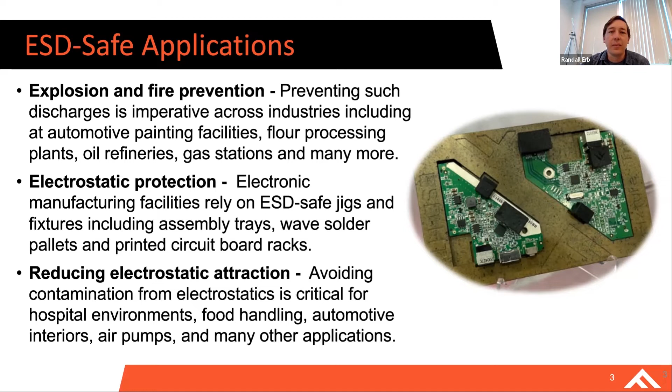One of the most effective ways to prevent the buildup of electrostatic charge is to allow the static charge to dissipate from the material component. This requires the material component to be somewhat conductive, but not so conductive that electrical shorting can occur.

Now Ben will walk us through some conventional and additive manufactured ESD-safe materials.

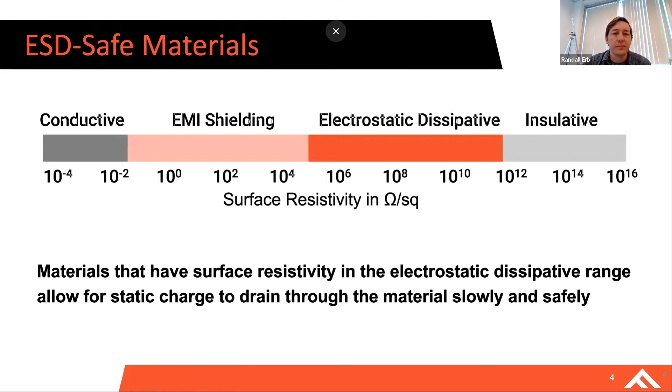Thanks, Randy. So in the industry today, ESD components are manufactured in one of two traditional ways. The first one being injection molding. A lot of your thermoplastics and elastomeric parts today are injection molded, and it's an all-right solution.

You're able to get high quantities for relatively low cost per part, but you run into a lot of lead time issues. You're looking at 6 to 8 weeks, if not more, to source a quantity of parts. Tooling costs are expensive, so for your short run batches of parts, the bulk of your costs are sunk into the tool itself. Once you get up into production scale quantities, it's much easier to swallow that pill.

But for smaller quantities, that's a tough hurdle to overcome. You're also looking at limited customization. You're building a mold tool, you're running parts, and you're not changing up those parts at all. They're going to be the same part from shot 1 to shot 100,000, so it's really tough to customize those parts.

On the other side of things, there's CNC machining for a lot of these materials. CNC machining does enable a lot more customization because you're doing one part at a time. You're able to change up tool paths in between so that you're able to create some more unique parts. You're still looking at some of the same lead time challenges though, where it's going to take anywhere from 2 to 4 weeks plus to get your machine samples.

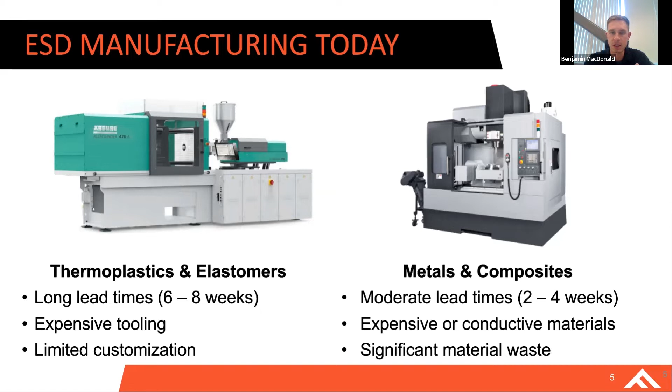It's also a very significant source of waste. You typically start out with a sheet of whatever target material you're going after, and you're machining away a lot of that material, so there's a lot of waste generated during that process. Ultimately, it's not an ideal solution.

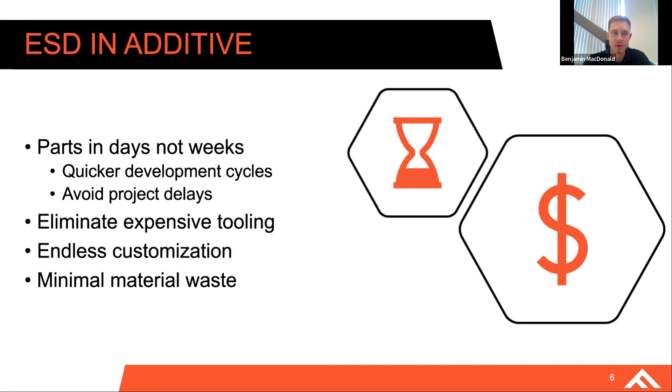Additive has jumped into the ESD market, and it helps overcome some of these hurdles. You're able to get parts in days, not weeks, enabling quicker development cycles and avoiding some of the delays caused by lead times for machined parts or molded parts. You're also able to avoid the expensive tooling from the injection molding space and a lot of the waste that you see in the CNC space. On top of that, you're able to have endless customization.

One of the real drawbacks to the ESD and additive space right now is the performance. You're able to get parts fast, with a lot of customization for fairly cheap, but you run into issues where you have to choose between getting FDM parts or SLA DLP parts. For the FDM space, there are some pretty decent materials, but you're struggling with low resolution, poor surface roughness, and these parts are going to be anisotropic. So it really limits what you're able to do with these printed components.

On the flip side, the SLA DLP space allows you to get parts that more closely represent a molded or CNC machined part, but you have limits with the materials you can actually process on these platforms. One of the main things there is that a lot of these ESD safe materials in the traditional manufacturing world are composites—they take a base polymer and add fiber to help tune the properties of that material. You're just really not able to do that in the SLA world today.

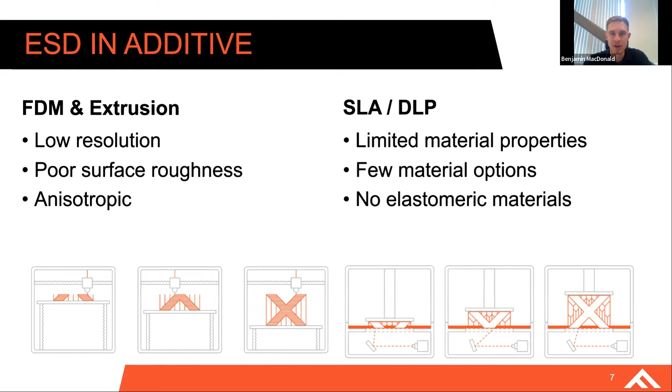And that's where Fortify really steps in. We're able to take additive manufacturing and pair that process with the performance of polymer matrix composites—those ESD safe materials, those highly filled materials that really enable true performance for valuable end use spaces.

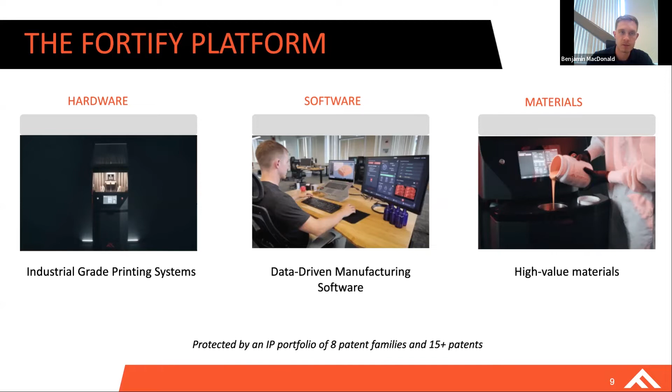So the Fortify platform combines hardware, software, and materials in order to enable users to print these high value materials. We start out with a robust printer platform, our Flux series of printers. We pair that with the Compass software that enables us to do some really unique things with the parts we want to print. And we pair that with our high value materials—fiber filled materials with performance that enables really great applications. So we're going to dive into three different modules that really enable our Fortify Flux platform to get the most out of the materials we're able to throw at it.

We'll start out with continuous kinetic mixing. This module enables us to mix, heat, recirculate, and suspend fibers during the full printing process. So going from layer 1 to layer 1000, you're printing the same material with the same fiber concentration at the same viscosity. This is integrated into all our Fortify printers, and it's really key for enabling us to print these highly filled materials.

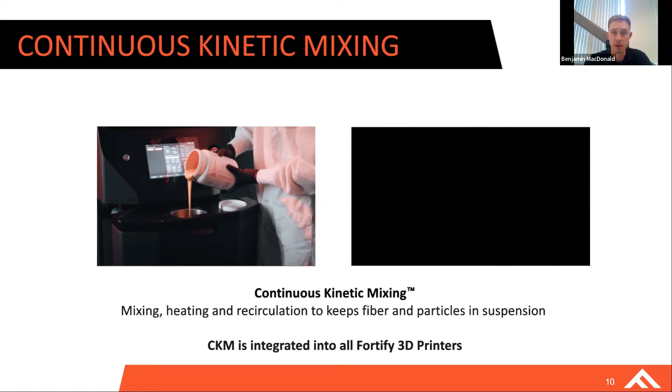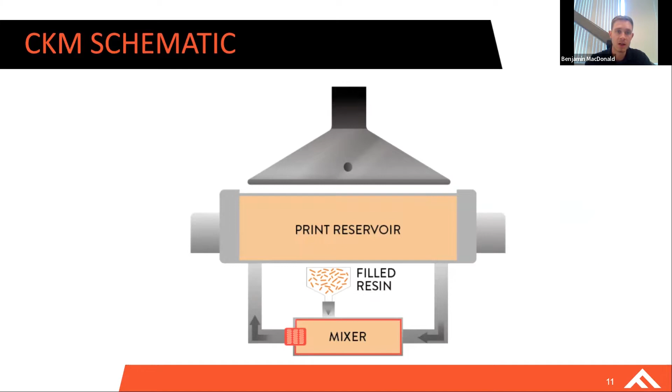This is a quick schematic of CKM, but essentially what you have is your reservoir and a mixer, and you pour resin into the mixer. That's where we heat, suspend, and meter into the reservoir out of our mixer. And in the reservoir itself, you have a continuous flow of fiber—call it fiber rich, but it's really homogeneously suspended fibers in that resin.

And what that enables is isotropic parts during that full print process. So rather than having our fibers be dictated by the layer lines themselves, we're able to orient those fibers in the Z-axis to overcome the traditionally weaker area of printed parts, being the Z-axis of parts. This is really key for us to print these functional parts that we talk about.

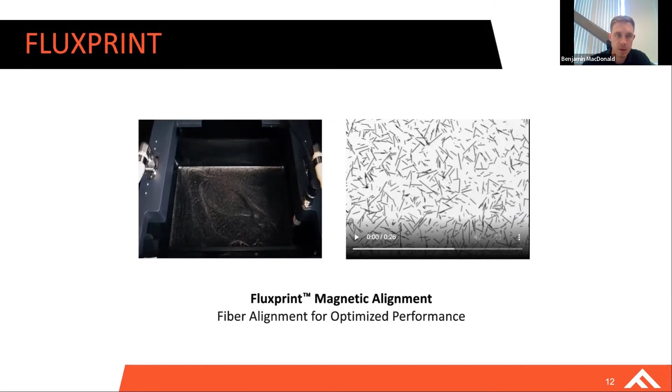We'll take a little deeper dive into the Flux print process here. So what we're doing is, on a voxel by voxel basis, we're selectively aligning fibers and then curing. You can see that we turn a magnetic field on to align in the Z-axis. We're only exposing the voxels that we want to cure with that select alignment pattern. And then we're able to either peel and print our next layer, or generate multiple fields within a given layer in order to really optimize the material properties of our parts themselves.

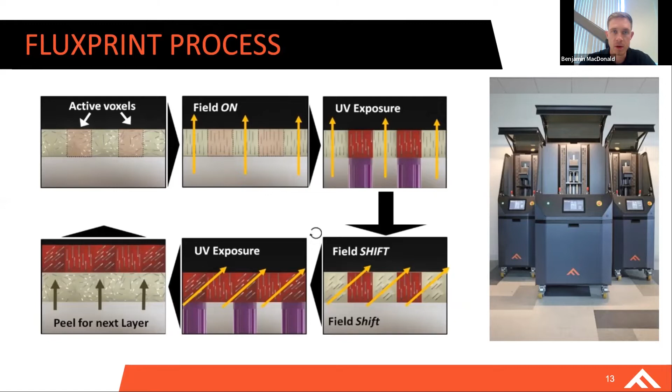With that, I'll turn it over to Randy to dive into our third module. Thanks, Ben. An additional Fortify tool we'd like to highlight today has to do with the complexity of formulating filled photoresins within the DLP printing process. To highlight this complexity, let's quickly break down the anatomy of a layer during a Fortify print.

Fortunately, all of this complexity is addressed in Fortify's Flux Developer platform.

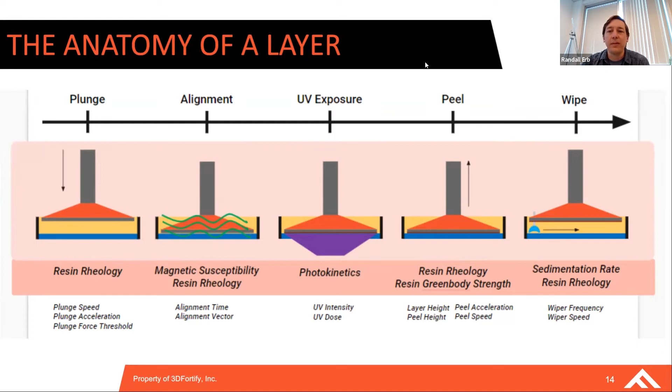What is Flux Developer? Flux Developer is a software product that enables fast to market material formulation work to be completed in filled photoresins. By using Fortify's Flux Developer software product, you can take a materials formulation through a series of onboarding experiments in Fortify's FluxHost printing software to characterize photokinetics, build plate adhesion, sedimentation, rheology.

With these details characterized, you can set up a material print configuration with the online Flux portal that will enable optimal DLP printing out of the gate.

Monitoring printed part properties for key performance metrics, feedback to the materials formulation or material print configuration is straightforward and fast. Our customers and partners use Flux Developer to formulate filled photoresins and speed their formulations time to market.

In addition, the material scientists here at Fortify also leverage Flux Developer to speed our own time to market for new formulations.

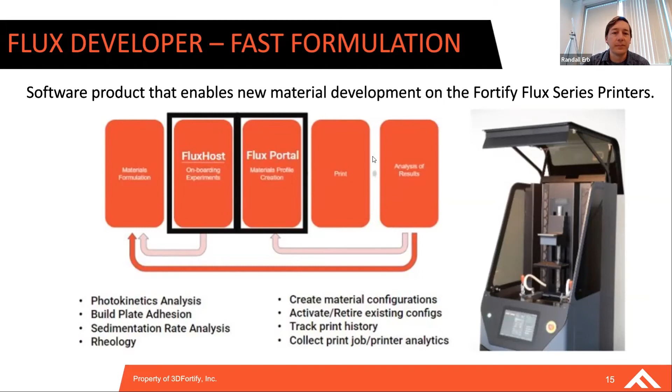By combining the Fortify tool set of Flux Developer, Flux Printer, and continuous kinetic mixing, we have realized two exciting and disparate formulations of ESD resin that are truly unique in the marketplace.

On the left, we have Fortify's ESD HT resin that boasts an operating temperature up to 284 degrees Celsius. This material has been validated in challenging environments like solder reflow ovens.

On the right, and at the opposite side of the spectrum, is Fortify's ESD elastomer. This material is the softest ESD material on the market and has a strain at break of 60%. Both of these materials lie within the static dissipative range and are ESD safe.

Ben will walk us through the details of the ESD HT material first.

Thanks, Randy. So before we dive into some use cases for ESD HT, we'll take a look at the data sheet real quick. So ESD HT, it's a fiber reinforced material. Like Randy said, it's able to operate in temperatures up to 284 C. So it's a really ideal candidate for high temperature applications like your solder reflow oven, things of that nature.

On top of that, it's boasting a 10 to the 6 ohms per square surface resistivity. So it's really ideal for dissipative applications. And it has a best-in-class resolution and surface finish. So you're able to pair the functionality of traditional materials with 3D printing resolution and surface finish.

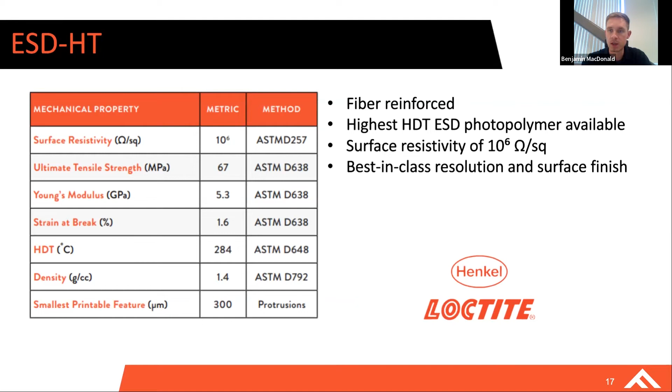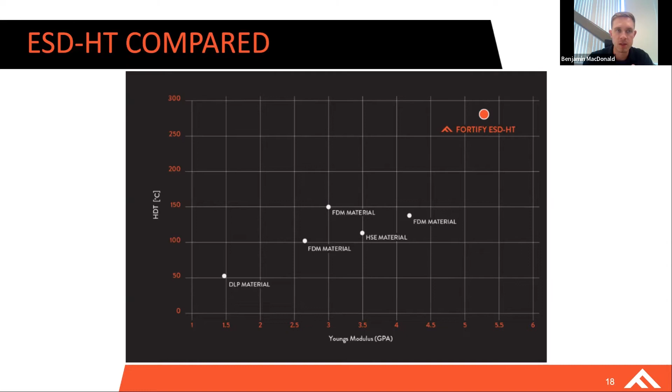So first up, we'll start off with a solder reflow tray. A solder reflow tray is used to fix your PCBs while they go through a thermal bake process in order to essentially melt and cure solder.

Some of the needs for something like this are being able to withstand temperatures up to 250 C, which our ESD HT is more than capable of doing.

You also need to be able to hold a tight tolerance in order to properly fixture these PCBs. If you're not able to hold that tolerance, then you'll run into issues, either fit issues where PCBs don't fit into position, or these PCBs will be loose and could potentially get dislodged, messing up your components and ruining that whole reflow process. And finally, this board needs to be dissipative because you do not want an ESD event damaging a component on your board and ruining the full production process here.

So for the solder reflow trays, Fortify's ESD HT material is really uniquely suited to handle the demands of that reflow oven.

Next up, we have SMT nozzles. SMT nozzles are there for surface mounting of PCB components on a solder reflow board.

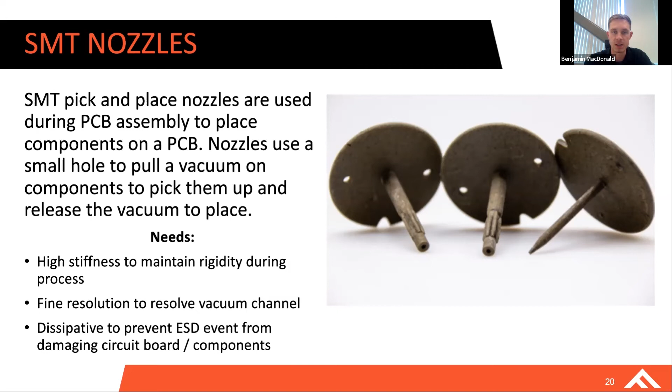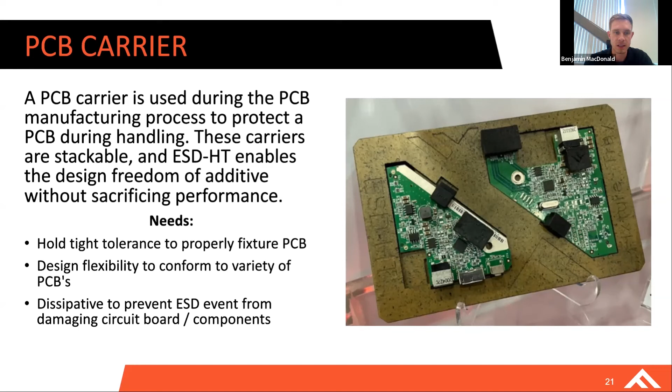When you're going throughout your lab space, your office space, this is going to allow users to pick up this tray rather than picking up individual components. You're going to prevent any sort of static discharge from jumping to the boards while you're transferring these trays. It's great for storage and really just handling PCBs in a safe manner so that you're not adding any unnecessary risks to this process.

And with that, I'd like to call out Fortify's ESD HT pilot program. We're currently running a pilot program for our ESD HT material, looking to get customer feedback and get this material in your hands. For a couple different geometries, including tensile bars, surface resistivity coupons, and a fine feature test, we're sending out these samples free of charge so that customers or end users can validate this material, see that it really works, and learn about how to get more parts out of this material. And with that, I'll turn it over to Randy for our ESD elastomer material.

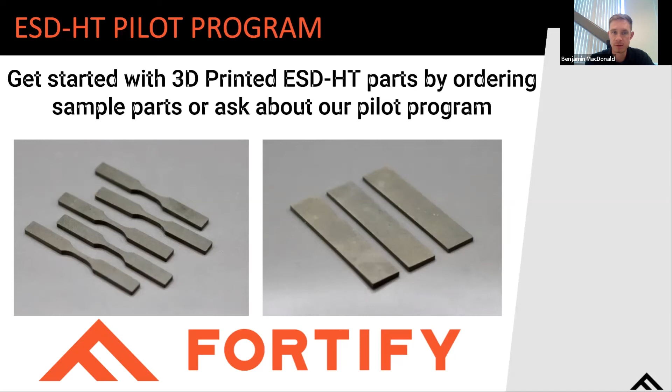Thanks, Ben. In addition to our ESD HT material, Fortify has recently unveiled an ESD elastomer product. This is the first ESD elastomer for DLP on the market, which opens the door for high resolution, high production capacity, and fast customization for this class of material.

ESD safe components printed from Fortify's ESD elastomer are very soft, have a very high tear strength, and are static dissipative with a surface resistivity of 10 to the 6th ohm per square. These compliant ESD safe components can be used in applications including boots or caps and enclosures.

For example, for companies working with changing printed circuit board designs, bespoke ESD safe boots can be designed and printed within a day using Fortify's ESD elastomer. These components can then be press fit onto a printed circuit board to protect sensitive electronics during the manufacturing process.

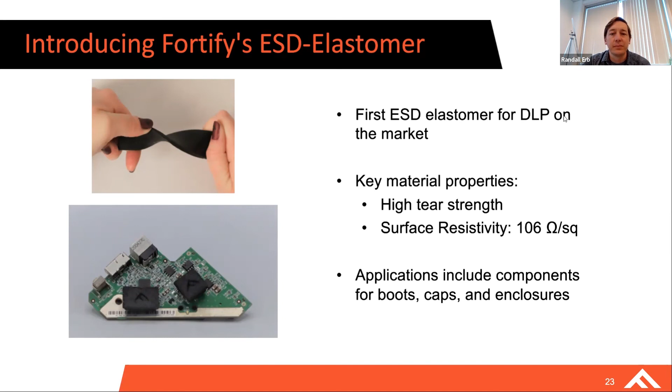In addition to being static dissipative, with a Shore A hardness of 70, Fortify's ESD elastomer is the softest ESD elastomer available on the market. This is softer than current options, even outside of the additive space.

This compliance allows for snug press fit connections with high precision. Fortify's ESD elastomer has a tear strength of 24 kilonewtons per meter and an elongation at break of 60%.

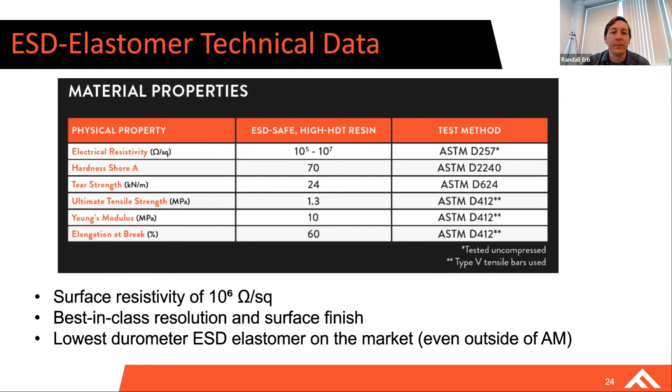One of the challenges of working with very soft materials is the possibility for strain-dependent properties. Compressing dissipative materials can drive electric percolation at the microscale, increasing the material's conductivity into the EMI shielding or even the conductive range. Fortify's ESD elastomer has been formulated to accommodate large strains of up to 25% while remaining safely in the dissipative range.

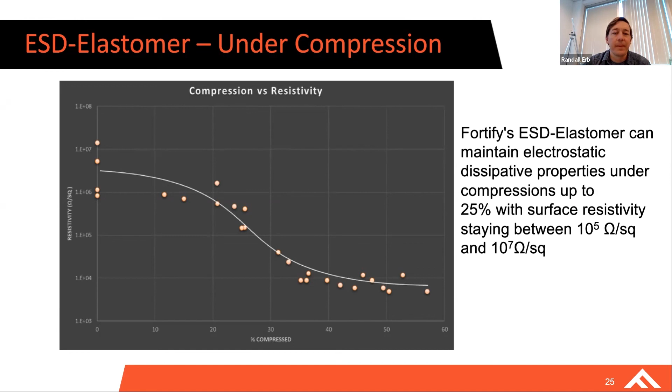Here at Fortify, we are excited to bring the ESD elastomer to market. The highest resolution, market-leading softness, and static dissipative properties enable Fortify's ESD elastomer to address broad application spaces, from compliant fixtures and electronic handling trays to soft robotic grippers to boot caps for PCB manufacturing. We are engaging with customers today to explore opportunities for our ESD elastomer product.